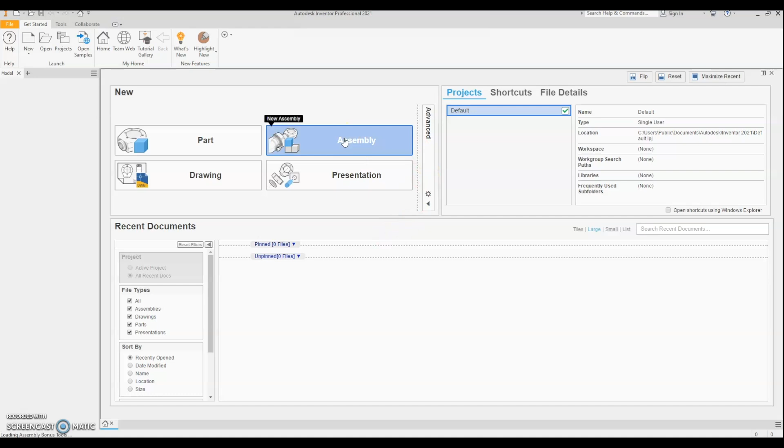Then we're going to place the content from a file, so you'll have to click up here. I originally did this wrong, so we'll go back and change it from place from content center to place component. I'm going to find my parts that I've made.

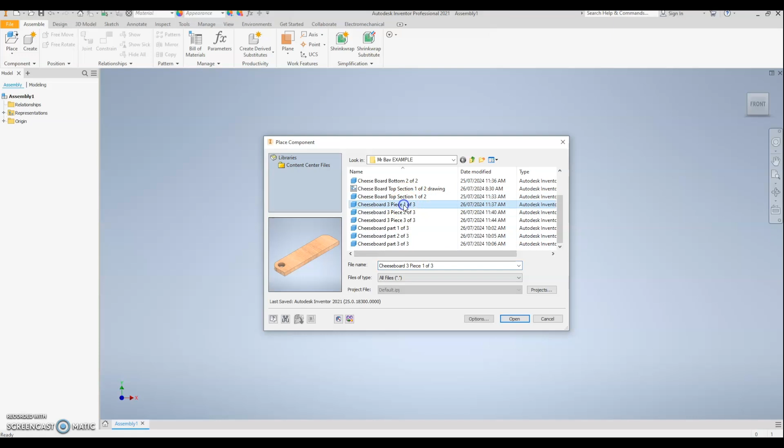I'm going to start with Cheeseboard 3-piece, 1 of 3. These are the ones I made in the other video. I'll click once and then press escape to not place it any more times. There it is. Then I'm going to go back to my place.

I'm going to find part 2. Again, I'm going to click to place it once and then press escape.

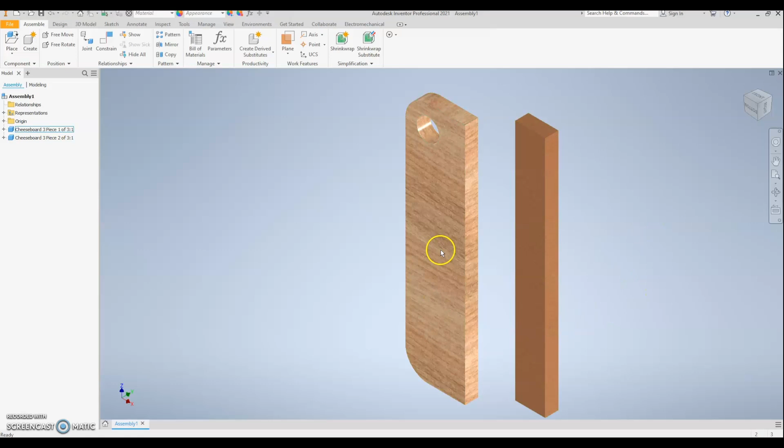I'm going to go back and use this constrain function. There are two options, mate and flush. We want the mate function. We're going to click on the edge, the whole edge will be highlighted green, that face there. So we click that and it will turn blue.

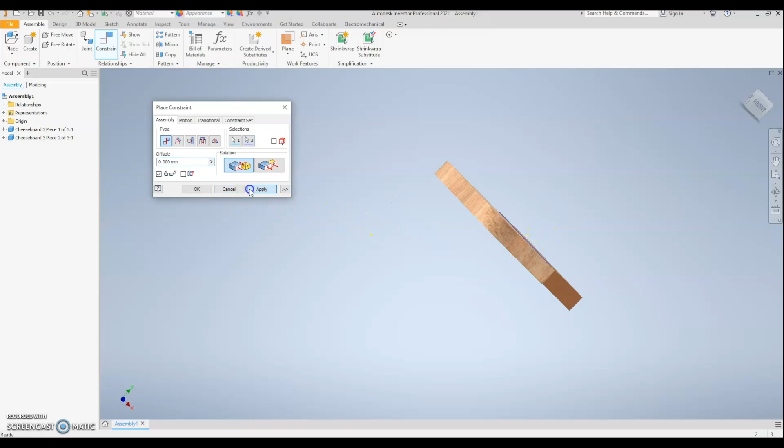I'm going to spin this around so that side is also going to click and turn blue, and they'll immediately snap together. You can click apply and it's basically going to glue those parts together. They're not necessarily lined up yet.

So now we want to click flush and we're going to do the edges there, those ends. That one will turn blue and then click on that one. There we go, they've lined up. Now they're even on that plane.

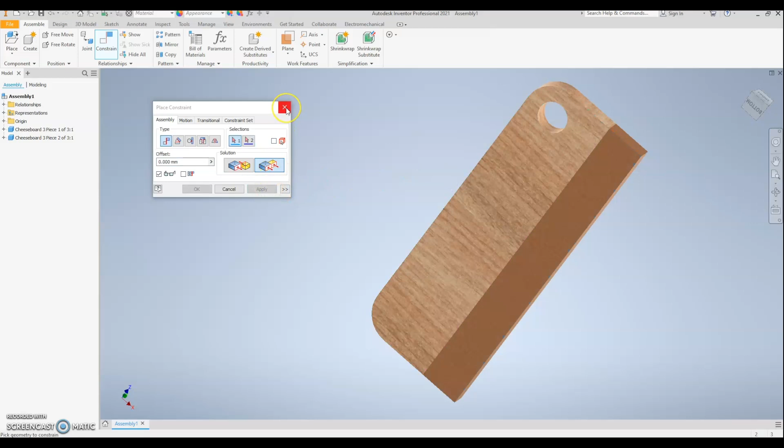The last thing we want to do is make sure the surfaces match. So click there, click on that one, and again click apply. Beauty, and now those are permanently stuck together. If you mess this up, you're going to have to click the undo button, there's nothing else you can do about it.

Right, now we can place the next one. We want to place part 3. There it is, click open, there we go. Click once, and then press escape.

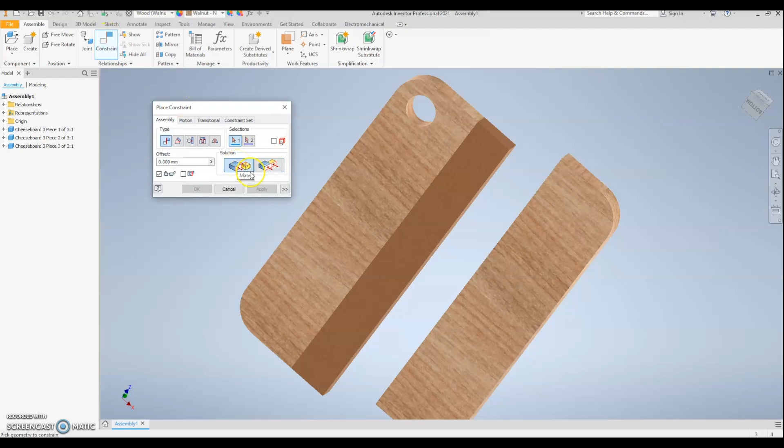Now I need to go back to constrain. I'm going to mate the edge of my centerpiece to that edge of my new piece I've just put down. I need to use the spin cube to line it up, not that one. If you get the wrong line, go back and undo.

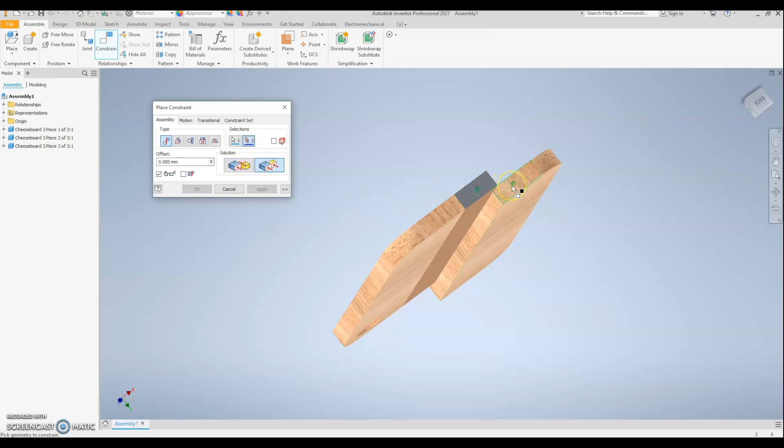There we go, that's the one. That edge there with that one there. Great, they've snapped together, but you can see they're not even yet. So now we're going to use the flush tool, flush that end grain with the end of that one, like that. Great, and then apply.

And now I need to line up the faces so they're even. So anyway, up, this just makes it easier to see. The whole outline of that shape turns green, so you know which one you're doing. Click, there we go, they've snapped together, and apply.

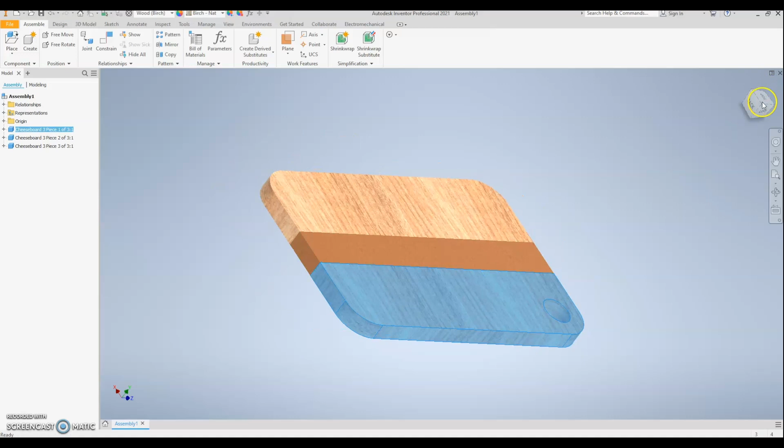Excellent, now I can close that. So there's my chopping board basically together. Well, it's a cheese board, isn't it? But it's not quite finished yet.

So I need to put some fillets on it because it's got some sharp edges. So I can spin it around. Very nice. And now I'm going to go up to 3D model, that 3D model menu at the top.

And there's that fillet tool that we used when we made the pieces. I'm going to set the radius to 9.5. Then again, where it says 0 selected, I can click on it, and I'm just going to do the edges. You can see as I click on them, they'll turn green.

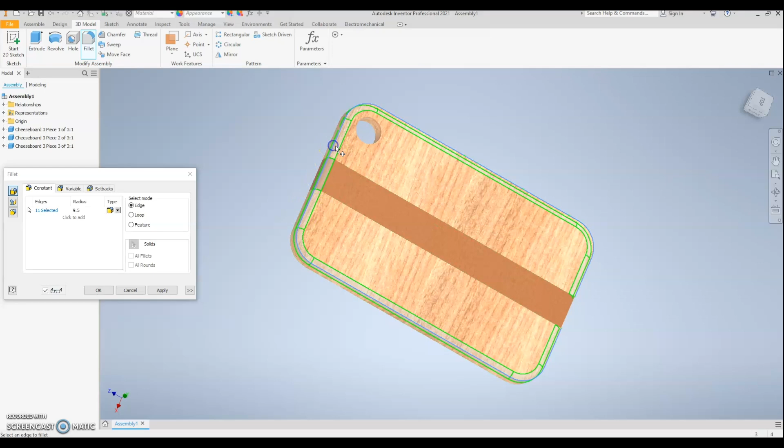Lovely, and then I can do that hole there, click on that. And then apply. There we go, that looks a bit nicer.

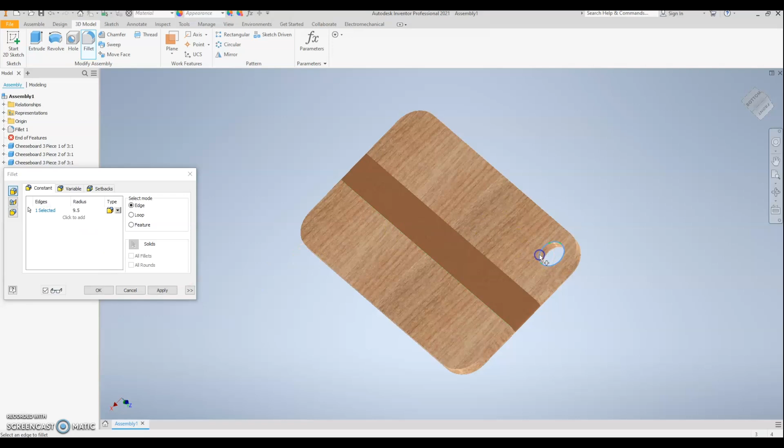And then spin it around the other way, use your view cube for that. Again, I can just select, there's the other side of the hole, and that one. That center section, you've got to click on two pieces. And then that edge there, click apply. And now you can close that.

There we go. That is the assembled and filleted cheese board all together in under 5 minutes. Make sure you save this file and make sure you save it in the proper directory.